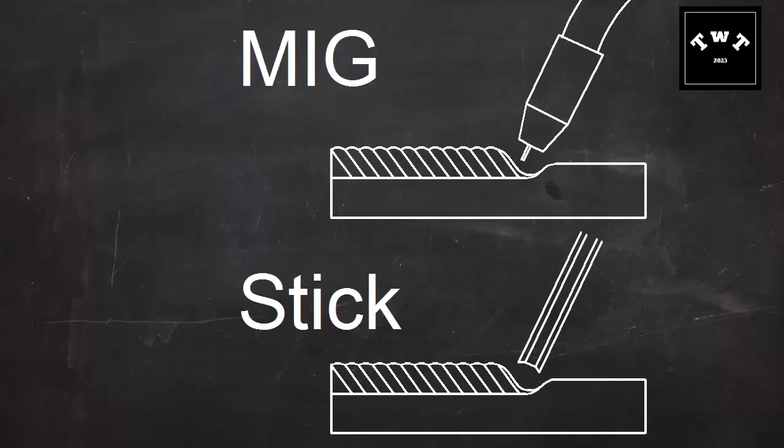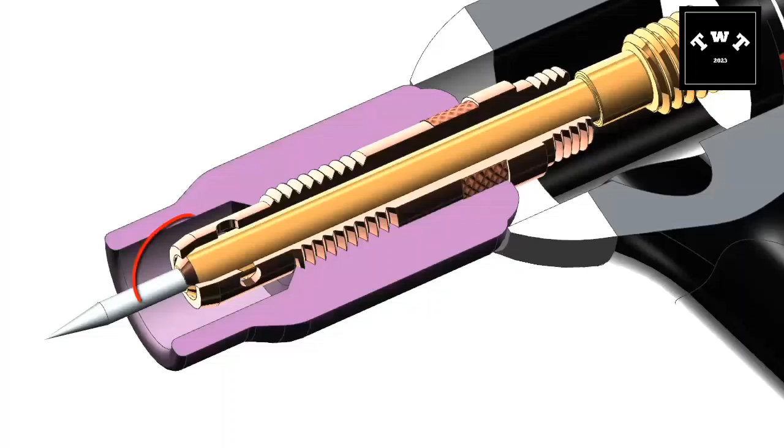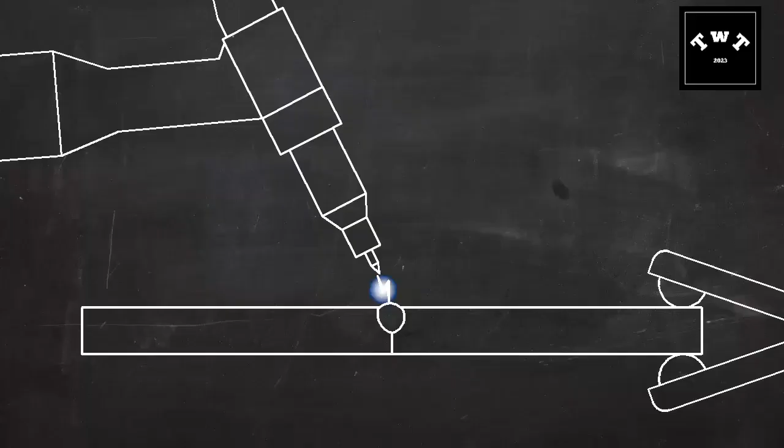TIG works by melting the base metal, which is the metal that makes up the two pieces to be joined. The heat is generated by an electric arc that forms between the base metal and the tungsten electrode. You can control the amount of heat with a foot pedal or with a thumb wheel on the torch.

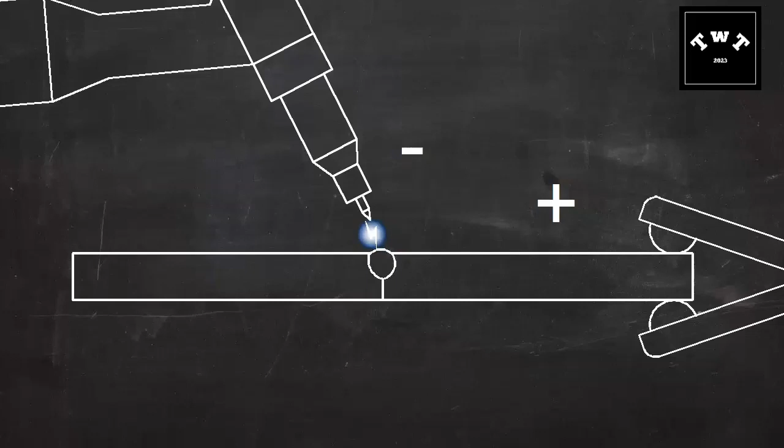For most metals, the current is direct current, or DC. DC is like the current flowing from a car battery. One wire is always negative and one is always positive. In DC TIG welding, the electrode is usually negative and the workpiece is positive. This is called DCEN, indicating that the current is DC and the electrode is negative. It's also called straight polarity, but DCEN is a more descriptive term. DCEN puts most of the heat on the workpiece, and it's the most common setup.

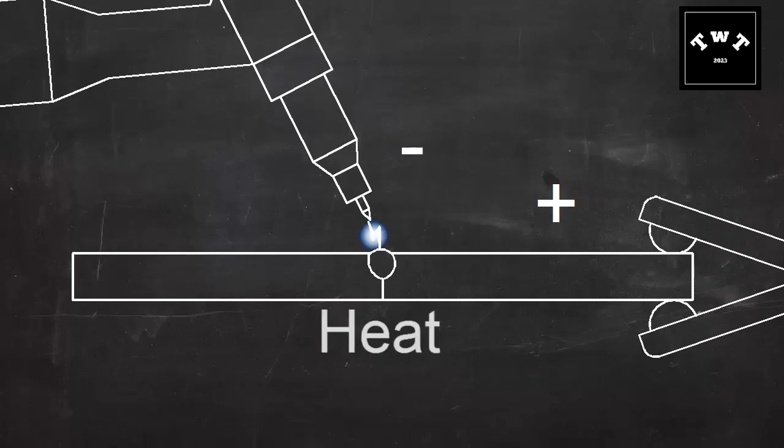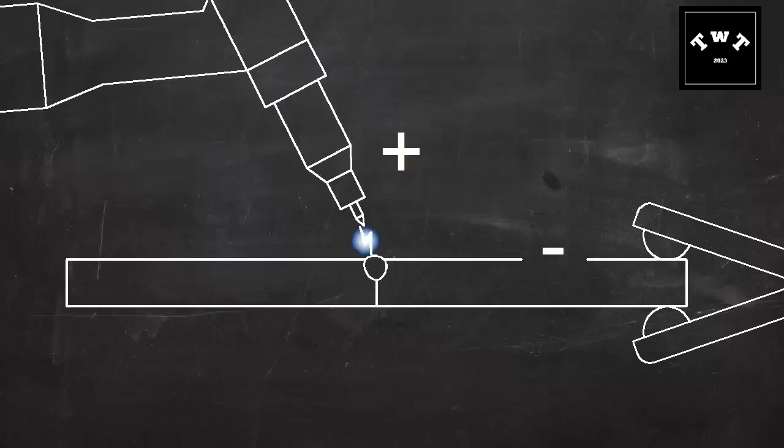When welding aluminum, however, AC is used. In AC, the positive and negative voltages switch back and forth between the electrode and the workpiece. This puts more heat on the electrode, but it has a cleaning effect on the workpiece. Aluminum forms oxides that float to the top of the weld pool and prevent a good weld. AC current helps control these oxides.

In an electric circuit, the current flows in a loop. In TIG welding, the current has to flow in a complete circle from the machine to the torch, into the work, and back to the machine. A work lead is clamped to the work to complete the circuit from the workpiece back to the machine.

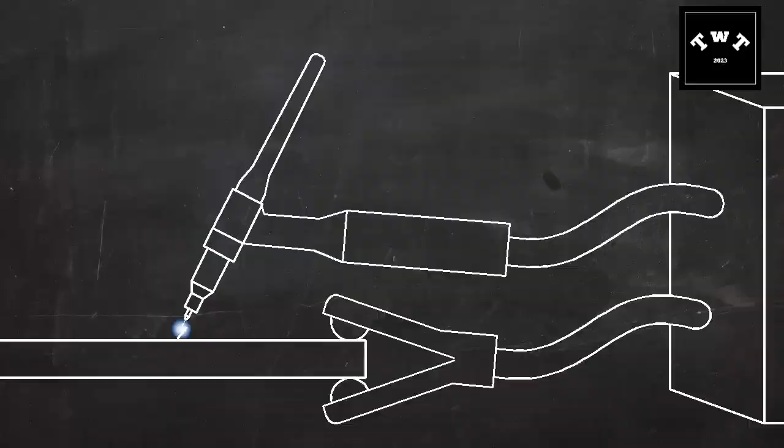You can TIG weld with or without filler metal, and that's not a choice you have in a lot of other processes. If you want to add filler metal to a TIG weld, use a filler rod, which is just a rod of metal with a specific alloy. You want to make sure that the filler metal you're using is compatible with the base metal and that it has the strength required to do the job.

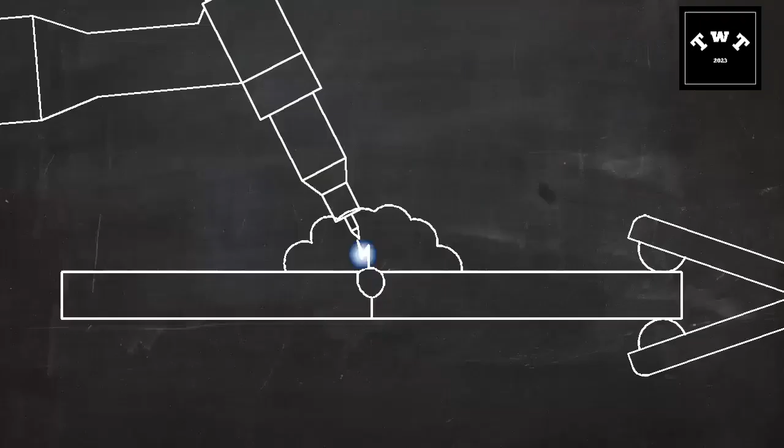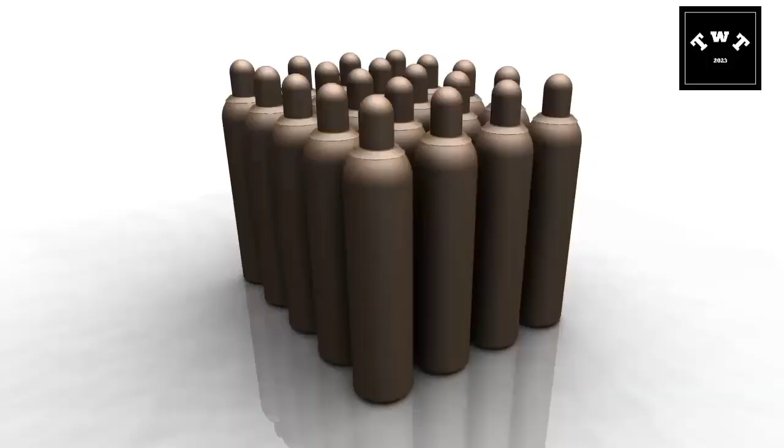In TIG welding, the molten metal is protected by a shielding gas. This gas, usually argon and sometimes helium or other gases, keeps the molten metal from reacting with oxygen and water vapor in the atmosphere. This shielding gas is stored in high-pressure cylinders like these. The pressure is reduced to a usable level by a device called a regulator. The shielding gas flows through a hose and comes out right at the point of the weld.

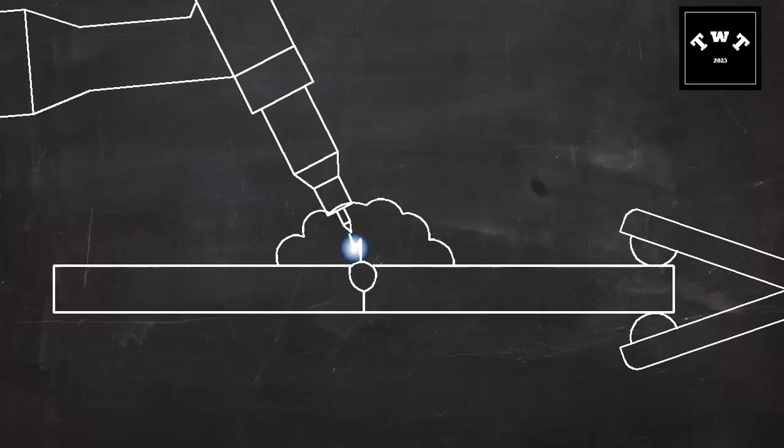So in summary, TIG welding is an electric arc welding process. It uses a non-consumable tungsten electrode. The filler metal is added separately in the form of filler rod, and the shielding gas comes from a high-pressure cylinder.